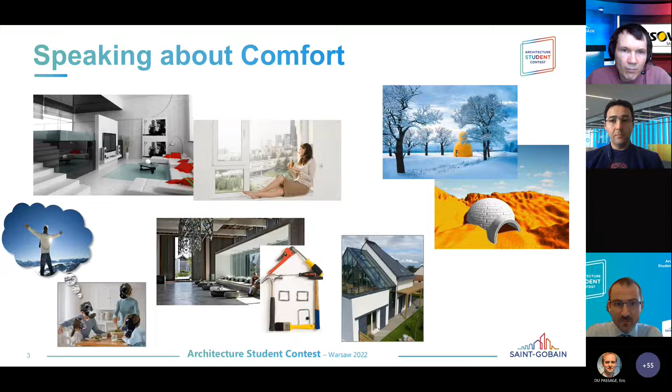Now, everybody is speaking about comfort, but the question would be, why do we speak so much about comfort? Well, feeling good is not just desirable. It's needed because it also has an impact on the way that the human body is working. There are so many medical and other research studies showing that if you feel good, if you have access to a certain level of comfort, then you can think faster.

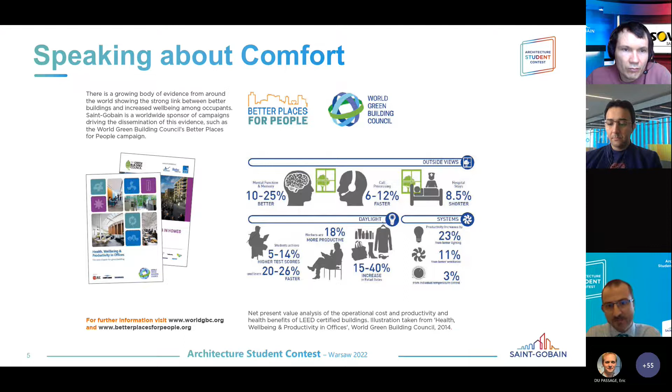Then there are plenty of examples. I will show you some others linked with higher scores in tests and so on, with productivity and so on. So it's not just that we desire this, but it's also needed. It's a question of how the human body is designed to work, if you wish.

Now, within the scope of the competition and within the scope of what we call comfort dimension in Saint-Gobain, we focused on 4 dimensions. One is linked with the feeling, it's the thermal comfort. The second one is linked with visual, with seeing, and it's linked with visual comfort. And then the last 2, one is the acoustic comfort, and the other one is linked with the indoor air quality, or if you wish, we can call it indoor air comfort.

These are the main 4 dimensions that we look at, and about these 4 we will try to give you some ideas, some hints, some direction, which in the end would serve you in the way that you think about this project. The final touch is yours. The project would represent the way that you interpret this, the way your mind was thinking about these dimensions and about comfort in general, for the well-being of the people that will live in the dormitories that you will design, or the people that will come in this renovated building that you will design as well.

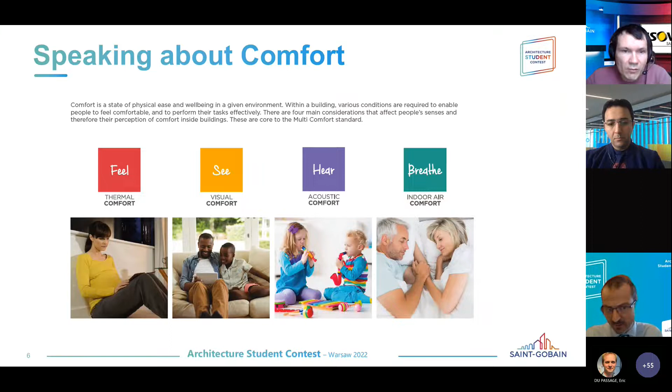Now, thermal comfort. Thermal comfort most of the time, or at least in our part, and when I mean our part, it's continental Europe, is most of the time linked with cold. You have minus 10, minus 15, minus 20, even more in some cases. Then you need to ensure that the temperature inside the house, your building, your office, whatever, is comfortable. But it can be also the opposite. It can be the comfort during the summer.

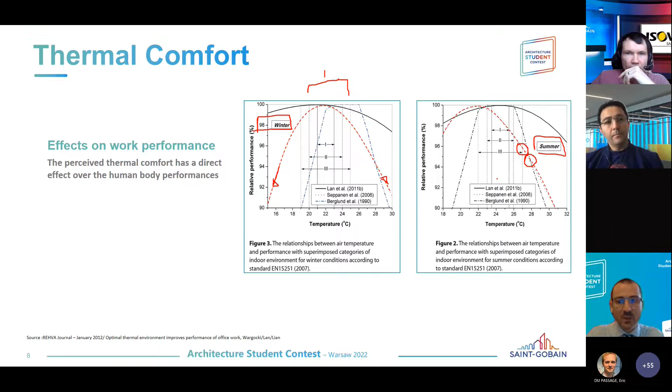In the summer, if you are at 27 degrees, maybe 28 degrees in a building where the ventilation is not designed well, you will have this decrease in the performance of the body, because the perceived thermal comfort has a direct effect on how the human body works. So it's not only that we desire this, it's also needed in order to work and perform with good quality.

Okay, what does thermal comfort mean? It has to do with the air temperature. It has to do as well with the surface temperature. You can heat a room, but if the windows are really poor and you put your shoulders close to them, you will have this chilling effect, and it will not be comfortable. It has to do with humidity and so on. To summarize, the idea is that you keep the temperature within the good region, using as little energy as possible.

Then it's good to have surfaces that are really pleasant when you touch them, and to avoid draughts even at floor level. There are many solutions you can choose from, starting with glazing, continuing with insulation, with plaster and plasterboards, with membranes to improve the airtightness and manage the moisture, and so on.

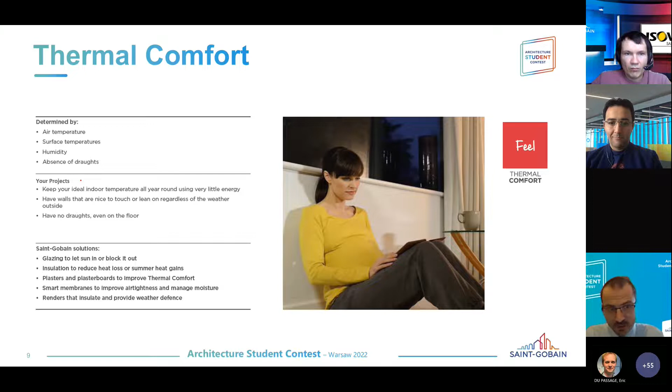Now, a few words about visual comfort. The eyes will perceive it, and when you design, you tend to think with your eyes, because this is the first impact that you will have. You will see the space, you will see the building, you will perceive the light, the colors.

There is so much evidence about visual comfort and its connection to light, and how important light is for human beings. I remember this very old Chinese saying, stating that in the house where the sun does not go through the window, the doctor will enter through the door.

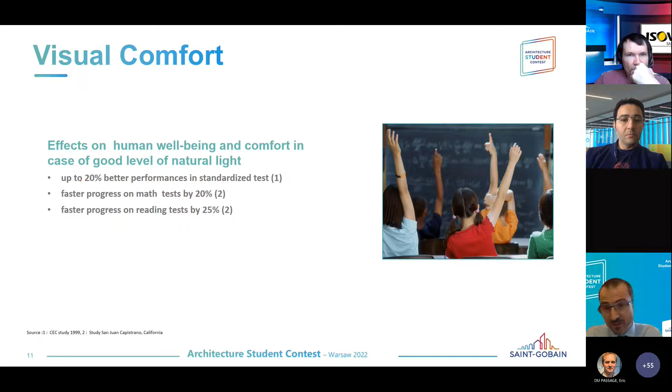You can link this with evidence showing that if you give good access to light in schools, the possibility of children to learn will increase, and the body will function better. As a result they will have better performance, faster progress on all kinds of tests like math or reading, and so on. This is just a few examples of the evidence.

Speaking about visual comfort, you can also think about the view outside. It's quite important to allow the workers, the people who inhabit the space, to have a view outside. The quality of the light, the luminosity, the absence of glare, and in general strive for having as much natural light as possible, without glare. Try to have rich colors, and try to bring the outdoors inside, in a manner of speaking. Here again, you can find many solutions within Saint-Gobain's portfolio, starting from transparent products to translucent ones, and opaque interior products.

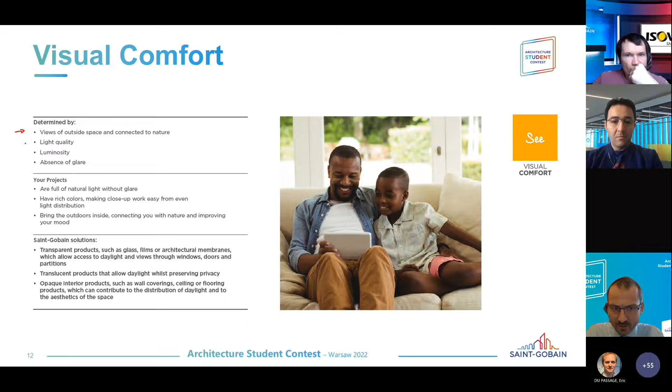Another important dimension would be acoustic comfort. We speak many times about how it's important to have quiet, and maybe it's also important to show a little bit why.

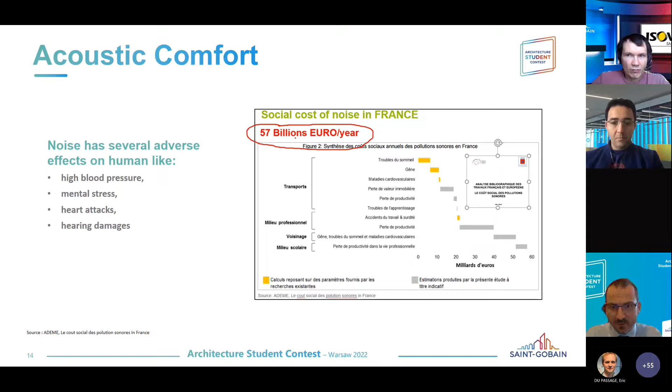Here you can see a report from France, ADEME, which has monetized the social cost of noise in France. I believe this was done around 2017-2018, and at that time the estimated social cost of noise was around 57 billion euros a year. This is basically the cost of noise in France, and you will find similar figures everywhere in Europe.

This is linked with the fact that noise has several adverse effects on the human body, starting with high blood pressure, mental stress, and ending up with heart attacks, hearing damage, and so on. We'll speak a little further about this in the acoustic presentation.

You need to take care about noise from outdoors, or noise from neighbors. You need to take care of noise which is propagated through the building structure. If you live in a multifamily building, and the building is poorly insulated, you will definitely know if somebody is doing some kind of impact action on the higher floor, like preparing some kind of schnitzel or whatever. You will feel it on the lower floors as well.

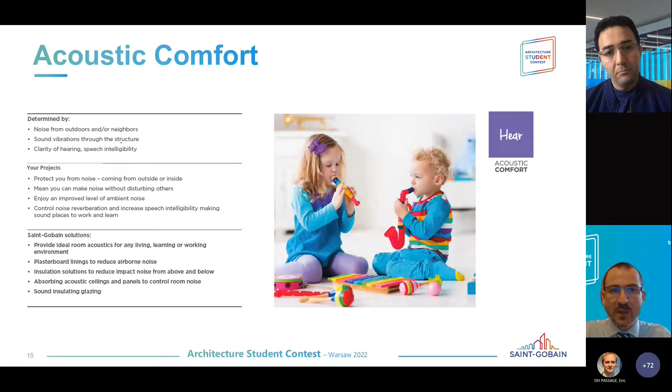Last but not least, and this is also very important, there's the clarity of hearing, the speech intelligibility, to be able to listen to what the teacher is teaching. Again, many Saint-Gobain solutions here can provide you with acoustics - solutions from plasterboard, insulation, acoustic ceilings, and so on. All of this is linked with acoustic comfort.

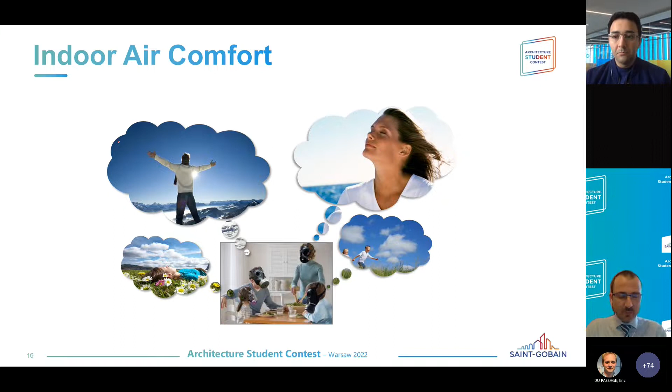From actions linked with basic strategy, basic activities, or initiative, you will find that the human body is unable to react in the right way. We'll speak a little further about this also in the indoor air quality training.

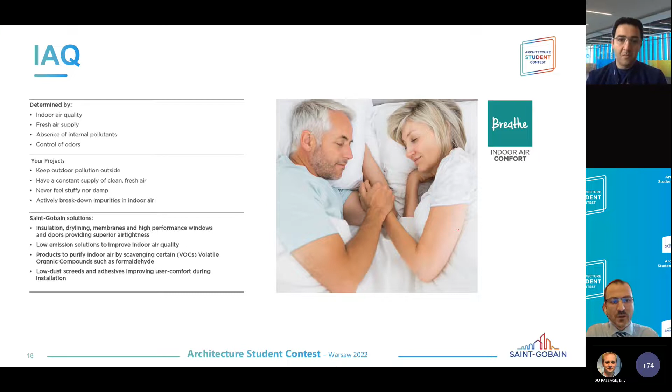So, indoor air quality, fresh air, and plenty of solutions that you can choose from Saint-Gobain.

Now, to sum them up, with some other examples - if we speak about thermal comfort, you can see here that there is a reduction of performance by up to 6% in case of overheating.

Just imagine yourself designing an office, and not thinking very clearly and very sharp about overheating, so you have very high temperatures. The percentage of lowering the performance of the workers, if you translate it into money, it's impressive. Here you can see the increase of productivity, and productivity can mean everything from being able to screw faster, to work something manually, up to the learning curve. It goes up almost by 20%.

And then you have, if you speak about poor indoor air quality, a decrease of 10% in performance. Or, if you wish, here it's about offices - about 65% of the people working in an office will be distracted by too much noise.

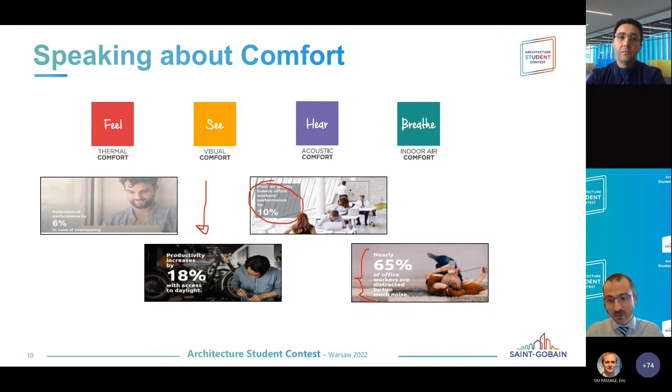Also, something which deserves a few moments - just to introduce it briefly, and we will discuss it a little further - these four dimensions are interconnected. When you choose to work on one, you need to take care of what happens with the others, because the connection between them is very strong.

Just think about the fact that I work on thermal comfort, I design a house, I think about a construction whose aim is to have thermal comfort, and I make it very, very tight, just to avoid any losses of energy. If I make it very, very tight, then all the air gains I was having through the cracks and the unintentional gaps of the building are no longer there. And suddenly I am stuck in a house which is very well designed thermally, but extremely poor in terms of indoor air quality.

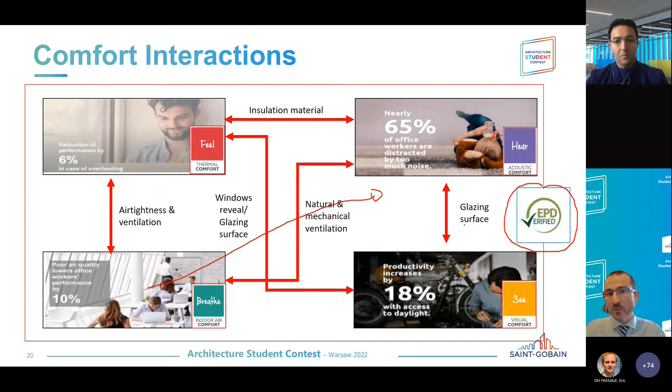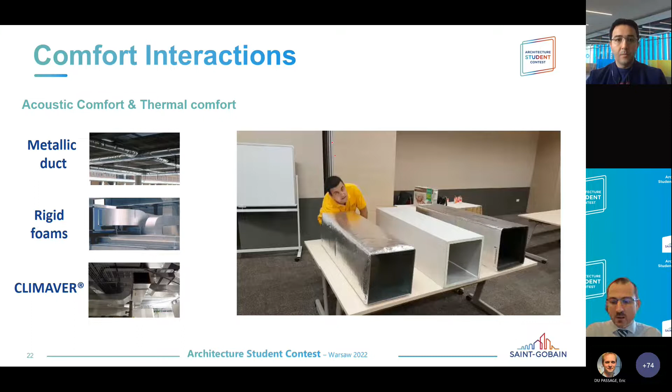And here are some examples about acoustic comfort and thermal comfort. I will come to this in the next discussion, as well as for indoor air quality and comfort.

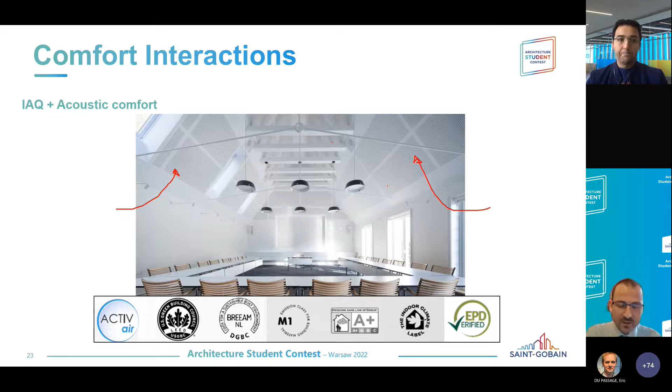So it's always a question of looking, broadening your view, and trying to think from different perspectives. When you choose a product, you ensure that it supports finally the sustainable approach, thinking about different comfort dimensions. That's why I put them together.

We have these four sensorial comforts: the feel, the seeing, the hearing, and the breathe. But you also need to think in terms of energy and carbon, material and resources, and last but not least, health and safety, because they are basically two faces of the same coin.

On one hand, you think about comfort. On the other hand, you need to think about sustainability. We need to design for using as little energy as possible and emitting as little carbon as possible. You cannot have one without the other—they do not work, and human beings will strive to get the one that's missing.

That would be the introduction part.

Okay, any questions so far? First of all, did you hear me up to now? Because I was kind of in a cave, you know. Yes, it was okay, totally clear. Okay, any questions? I'm popping up for questions, striving to get some from the students to see if it's all clear. Then we need to sit one more hour and discuss it. No questions? No? It's a sort of a further illustration, if you possibly can give me.

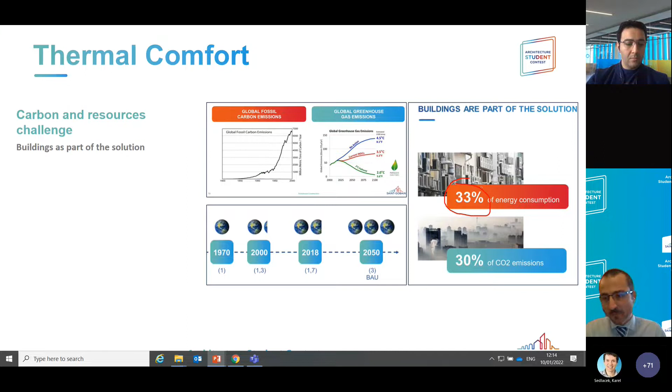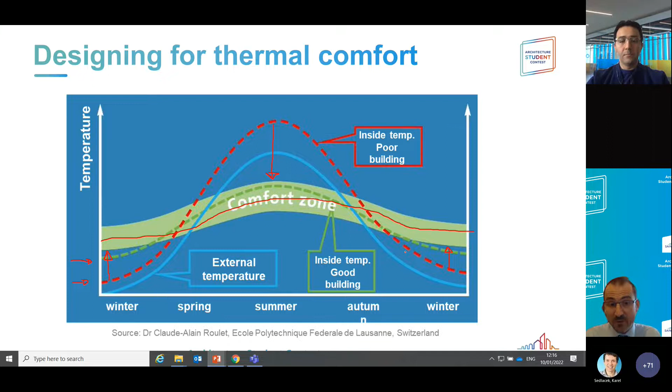Now, there is a very nice movie that I would like to share with you. Just allow me one second.

Okay, I have it here. Hopefully, and please let me know if you can hear as well the sound. You can hear the sound? No, we can't. Oh. No. Moment, I guess. You have to reshare your screen. Yeah, no worries, no worries, I will do that in a second. So let me see, maybe now.

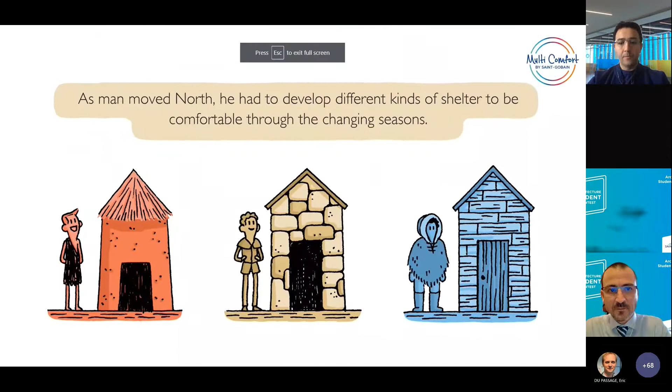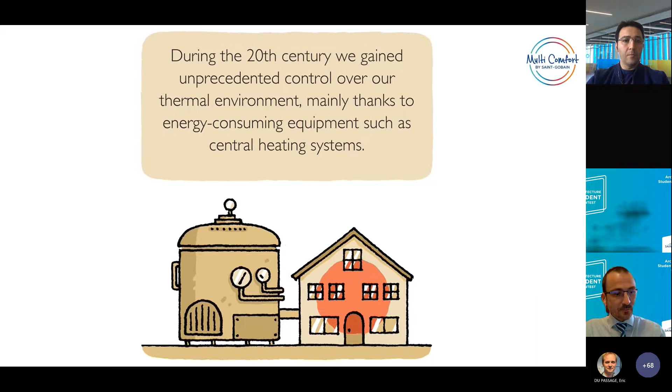Early settlement began in mild climates. As man moved north, he developed different kinds of shelter to be comfortable through the changing seasons. The building envelope, which acts as a filter between the inside and the outside, gradually became more sophisticated. During the 20th century, we gained unprecedented control over our thermal environment, mainly thanks to energy-consuming equipment such as central heating systems. As we advance into the 21st century, world population, the percentage of urbanized areas, and expectations of comfort and well-being continue to grow.

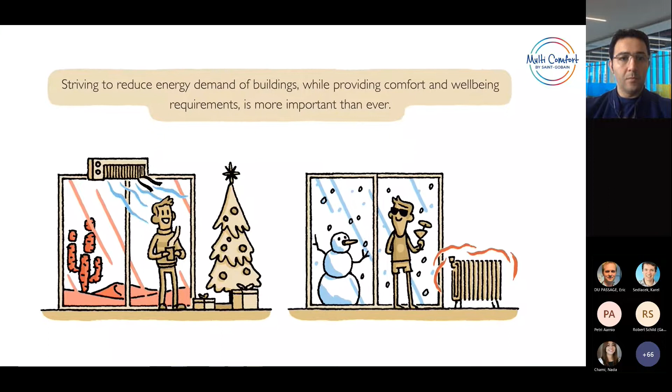Striving to reduce energy demand of buildings while providing comfort and well-being requirements is more important than ever. Designing efficient building envelopes is one of the first steps to consider.

Today, we spend more and more time indoors, where we expect a level of thermal comfort that ensures comfort and well-being, but can be provided efficiently.

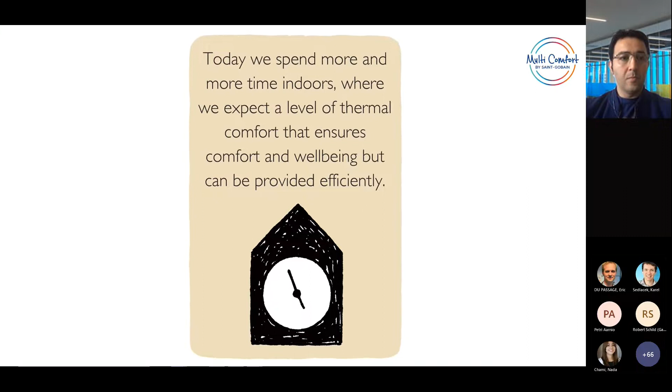While extremes in temperature can be fatal, even gentle fluctuations can cause us increased pleasure or discomfort. Concentration, manual dexterity, and instances of accidents can be influenced by both high and low temperatures.

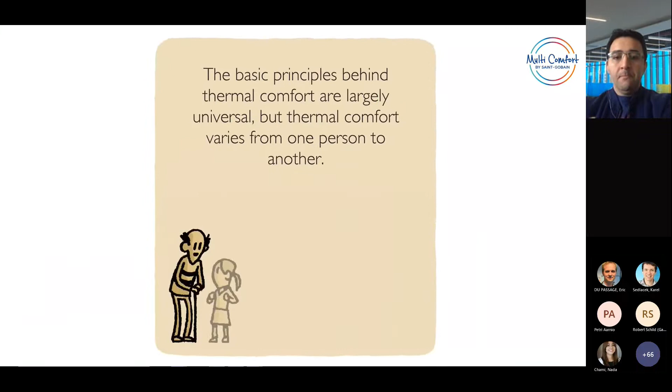The basic principles behind thermal comfort are largely universal, but thermal comfort varies from one person to another. The physiological aspect of thermal comfort.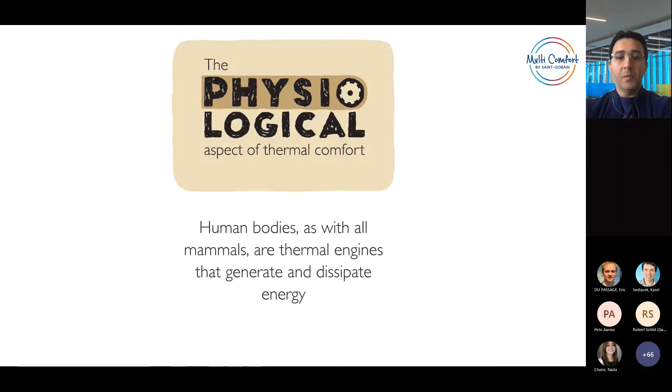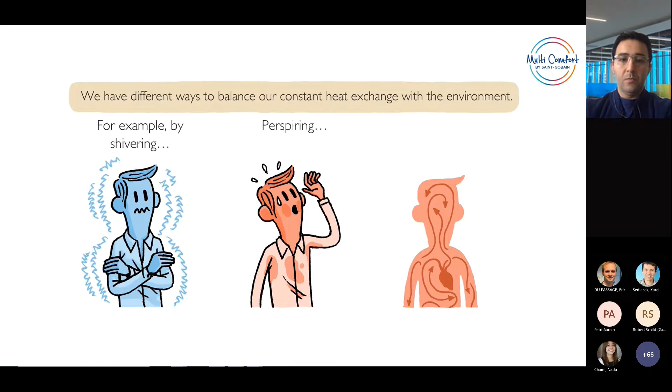Human bodies, as with all mammals, are thermal engines that generate and dissipate energy. We have different ways to balance our constant heat exchange with the environment, for example, by shivering, perspiring, or modifying our blood flow to regulate heat distribution.

The objective of our metabolism is to regulate our body temperature with minimal effort, if possible. So we need to be able to control the physical environment surrounding us. The physical aspect of thermal comfort.

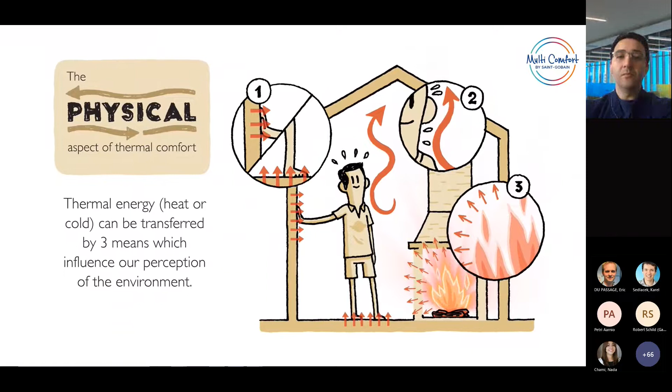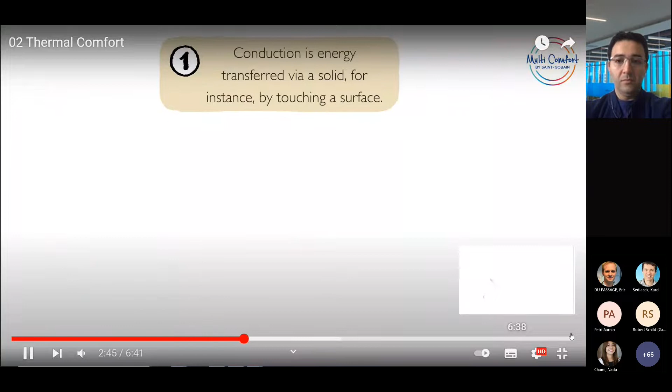Thermal energy, heat or cold, can be transferred by three means which influence our perception of the environment. One, conduction is energy transferred via a solid, for instance by touching a surface. Two, convection is energy transferred from a solid to an adjacent gas or liquid. Three, radiation is energy emitted from a surface.

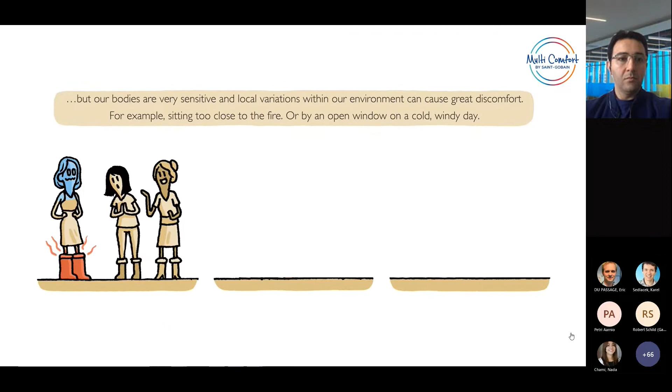An overall balanced thermal environment is key to feeling comfortable. But our bodies are very sensitive, and local variations within our environment can cause great discomfort, for example, sitting too close to the fire, or by an open window on a cold, windy day.

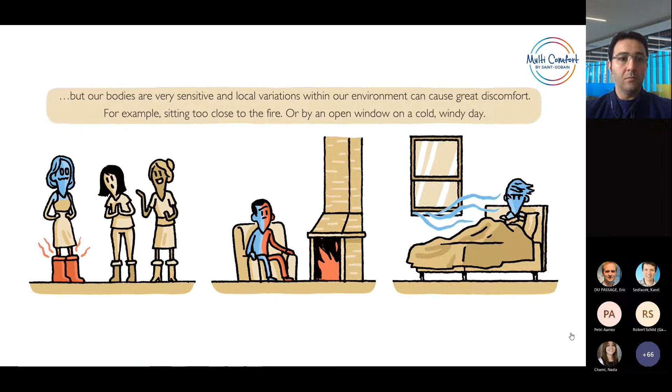The socio-psychological aspect of thermal comfort. Many other factors influence our perception of our thermal environment: our current emotional state, mood, or how tired we feel.

Our thermal programming and social background, as well as other environmental factors such as noise or glare, which can make us agitated and feel hot.

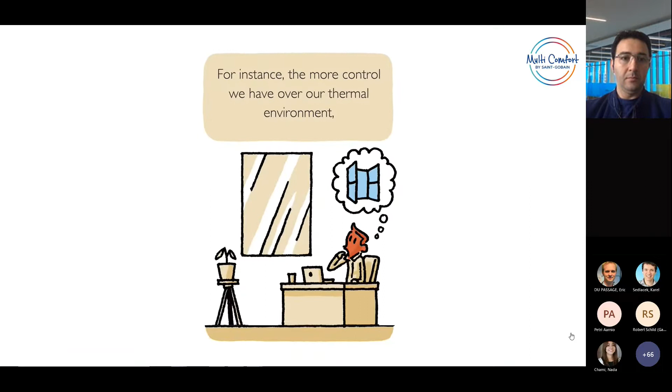Our perception of heat also depends on varying tolerance levels. For instance, the more control we have over our thermal environment, the better we feel and the more productive we are, whether or not we choose to use this control.

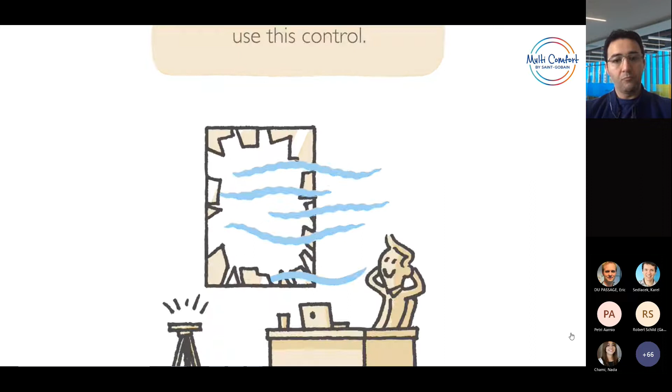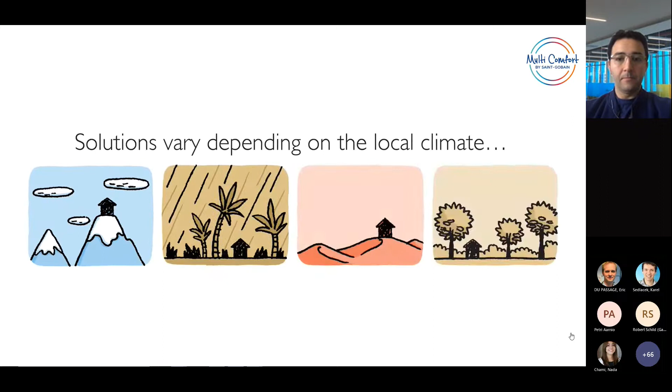Designing for thermal comfort. There is no one-size-fits-all recipe for thermal comfort. Solutions vary depending on the local climate, as well as the type of activity performed by the building users.

The building envelope acts as a filter between the exterior and interior climates. Designing it efficiently implies the consideration of five main factors.

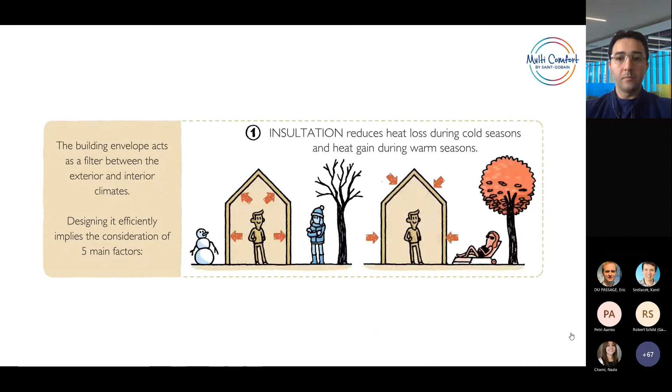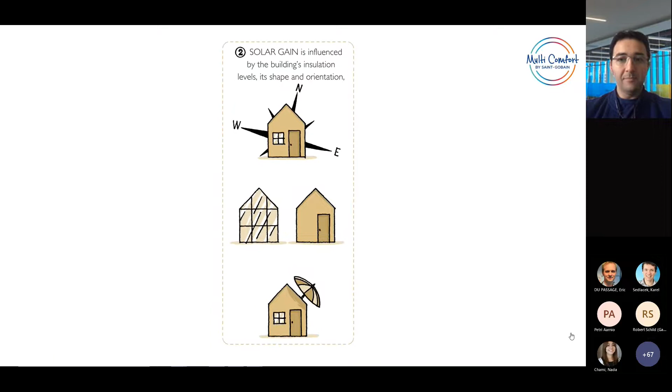One, insulation reduces heat loss during cold seasons and heat gain during warm seasons. Two, solar gain is influenced by the building's insulation levels, its shape and orientation, the window to opaque wall surface ratio, the type of glazing, shade or shading devices.

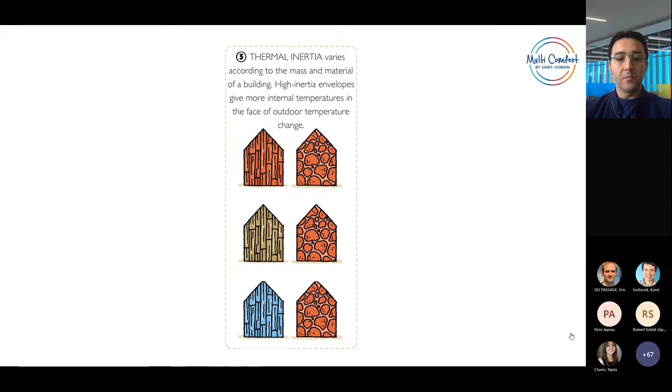Three, thermal inertia varies according to the mass and material of a building. High inertia envelopes give more stable internal temperatures in the face of outdoor temperature change.

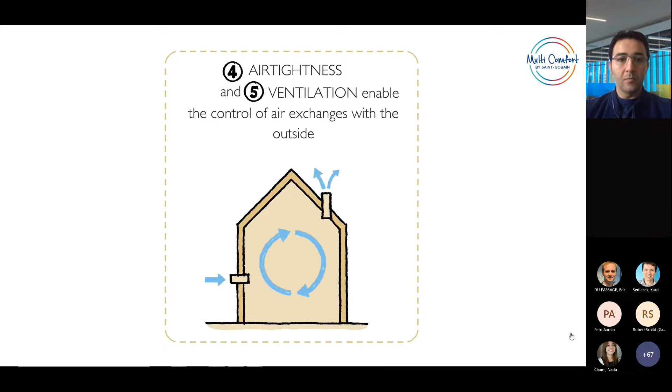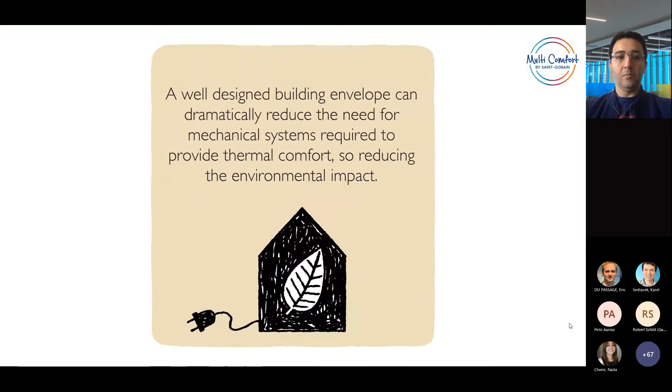Four, air tightness and ventilation enable the control of air exchanges with the outside. A well-designed building envelope can dramatically reduce the need for mechanical systems required to provide thermal comfort, reducing the environmental impact.

The future. Although our basic thermal comfort requirements are likely to remain the same in the future, our outdoor environment is likely to change further. Climate change will play an increasingly important role in the design of the built environment.

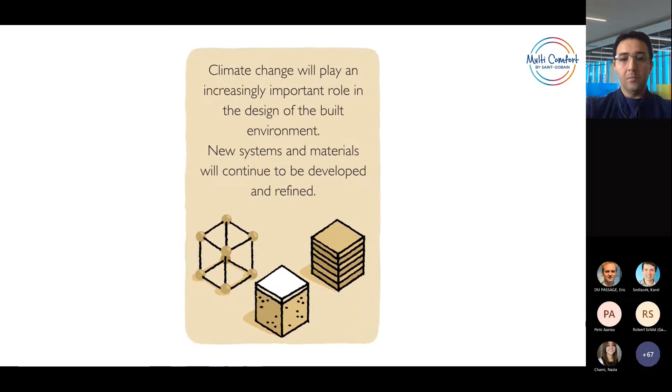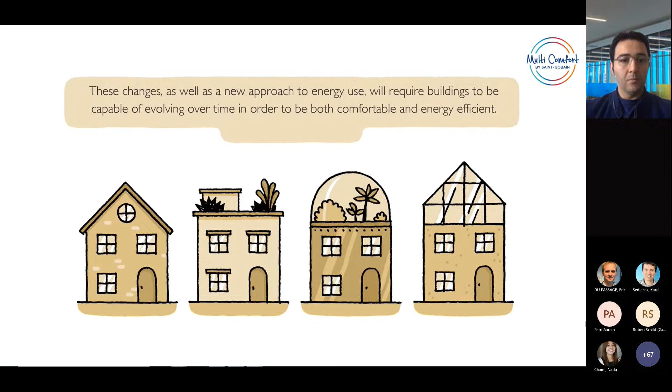New systems and materials will continue to be developed and refined. These changes, as well as a new approach to energy use, will require buildings to be capable of evolving over time in order to be both comfortable and energy efficient.

A key factor in this evolution will be to ask ourselves what levels of thermal comfort will be considered acceptable. Should we just put on a jacket rather than turn up the heat?

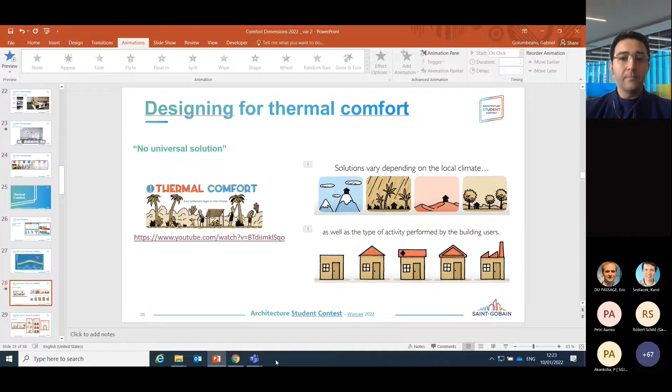Yeah. That's an open question as well. What will be the level of thermal comfort in the future? How will humans react to this in the future? Because this is also a question open for the interpretation of the participants, because you can think this from both perspectives. You can think, okay, I'm designing, looking at this, I did the maximum which I could do, but it's also something that the humans need to take into account, human beings as such, need to take into account themselves. Now, we were seeing here some of the main criteria.

You can see still the presentation, yes?

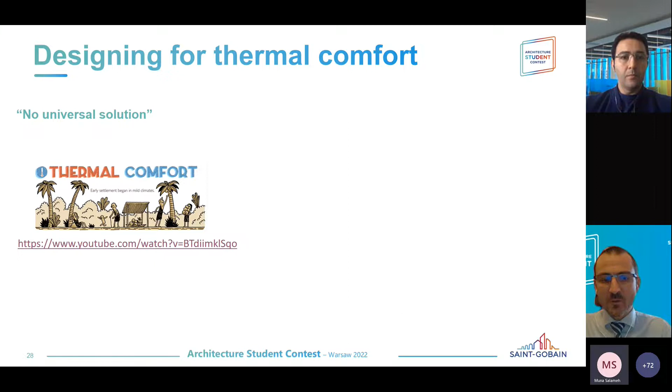Yes. Good. So, when it comes to the variation depending on the local climate, we know for sure that we are in a European moderate, cold moderate climate. We know also the activity that will be performed there. So we remain with some ideas that we can discuss.

First of all, we are looking at the envelope. So we need to treat the envelope in order to ensure that during the winter I have pleasant temperature inside, that it doesn't get too cold, and also during the summer I ensure that I don't have too much heat. Then once I have worked on this, I can think about the second step, which is the solar gains. Linked with this, it's the way that I'm going to organize my building, the way that I'm going to design it towards the cardinal points, then the type of the glazings and how much I will make the glazings.

And then we can look as well at the thermal inertia, and we can look as well at the air tightness and ventilation. And this part with the air tightness and ventilation, in my opinion, it's linked also with indoor air quality, and I will discuss a little bit about it within the second session of indoor air quality.

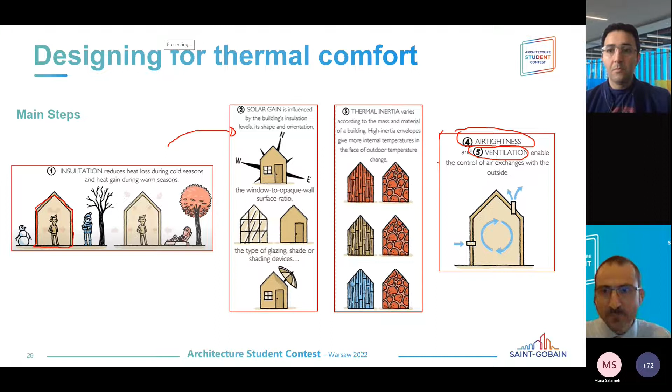Now, coming back to what we were discussing, we know that a well-designed building envelope can dramatically reduce the need for mechanical systems. That's also our aim, to ensure that by the envelope itself, because this is the first step, I decrease as much as possible the need for mechanical systems, independently of what the mechanical system is. Can be the central heating system. I design it in such a way that I need only small amounts of energy to keep it cooler in the summer or pleasant in the winter.

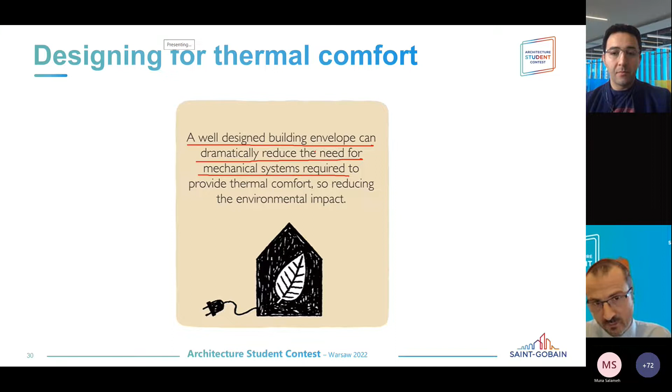Now, if I speak about this and the usage of energy, this is a study which was done some years ago. They were asking people if they have an idea how much of the energy that they spend is used on different things. And you can see here on the right side the consumer's opinion. So the perception was that we use a lot of energy on the electrical appliances, of course a lot of energy on heating, but also a lot of energy on hot water.

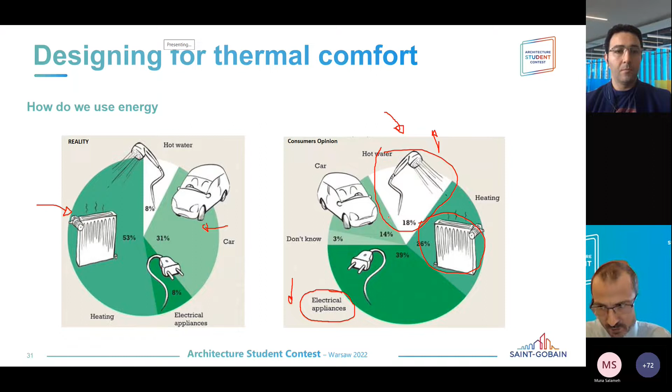And if I'm looking at the European moderate climate, roughly around 75% of the energy is used for heating and cooling. If I go more towards north, it will be heating, almost no cooling. If I go to Spain, to South Europe, then I will have a little bit of heating, but I will have a lot of cooling as well.

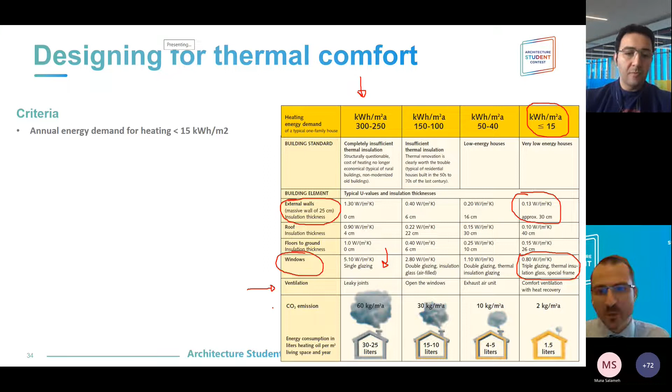But then if I fully insulate the house, and I do all the things that I can do to keep the energy inside, maybe I find a smarter way to ventilate than to open the windows, because it's pretty much like I would have a very good fridge, but then I keep it open. It's pretty much the same principle, if we wish.

And then the more tight the building is, the more I need to bring this air to be able to breathe. And if I'm depending on some kind of a system to bring the air, maybe I can make a transfer of energy from the air that I have to take outside to the air that I have to bring inside. And this way, I have some kind of ventilation with heat recovery.

And here you can also see the effect in terms of CO2. From 60 or maybe 30, depending on when the building was designed, I would go to about 2 kilos per square meter in a year. That's just to give you a rough feeling of where this criteria positions you in terms of building.

And this is generally the criteria that is going out in Europe, because almost everywhere in Europe you have this nearly zero energy building legislation, which lowers very much the consumption that you need for heating and cooling the building and for all the others. And on top of it, it brings active measures of generating green energy.

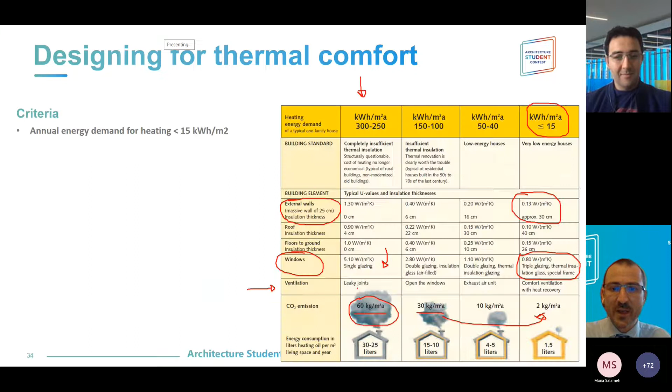Okay, and this is also what I was mentioning. If I try to put active measures on buildings like this, well, I don't have the right word, but it is not effective. I'm consuming so much that I would need to produce a huge amount of energy, and I'll still need to invest a lot to do it.

The right way, the smart way to do it is first to decrease as much as possible the energy need through the envelope. And then whatever needs remain, and these needs are linked with comfort, I can either support them to a net zero energy level, which means that my building will be a zero energy building. I will not consume energy. I will not generate either, but I can very easily go one step further and make my building a generator of energy by using photovoltaics, if you wish.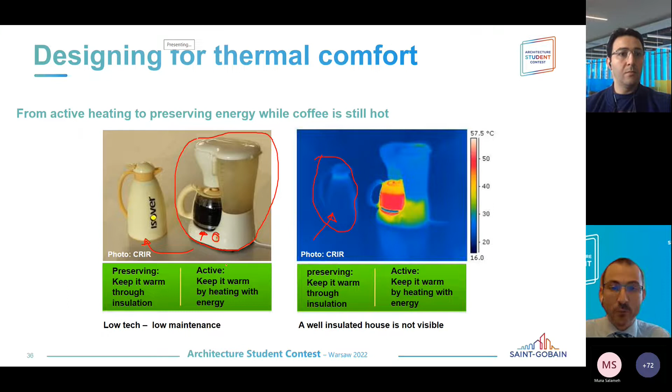This one shows nothing. And this is the kind of image that you should strive for in your buildings. If I transfer this image to a building, this is how it could, or how it should look. Yeah, this is a very poorly insulated building. You can see it bleeds energy, it bleeds heat all over. More at the structural things, which are here, here above the windows and everything else, here at the last floor. And here,

it's more or less the same image of the same building after retrofitting. And you can see here in terms of the wall that the losses have been very much decreased. Here there are some open windows, tilted. Here you can see as well that there is some kind of ventilation which was put in, and of course here is the open door. So we can say that the entrance door is not necessarily the most performant.

But this is what you should strive for. This is the image that you should think about, and this is very simple to look at. This is an energy audit which is done. Just take an infrared picture of the building, and you can instantly feel whether this building has been well designed, or contrary, has not been very well designed.

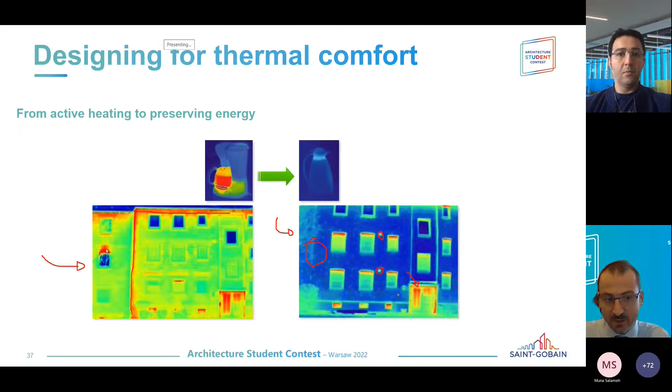Now, if we speak about how you get from active heating to preserving energy, well, we need to look a little bit at how we lose the energy, or through which elements we lose the energy. So if I'm looking at a house which looks slightly like this, then I'll have about 25% through the walls. I will have about 30% through the roof. Something will go through the basement. I'll have the windows, of course. I will have some air leakages, and last but not least, I'll have some thermal bridges which are influencing my losses. And if I put this together, because I lose something, then I need to ensure that this energy which is needed, I put it somehow back.

And if I'm having on this side the losses, then on the other side here, and I'll just scroll in, I have the gains. And what kind of gains do I have in a building? Well, first of all, I can play with the sun. I can always get a lot of energy from the sun. It's just a question of using it correctly. Then I also have some internal gains. I gain heat from the people who are working, because basically each person is somehow like a small radiator. I can get energy from the computer. I can get energy from all kinds of devices that I have inside.

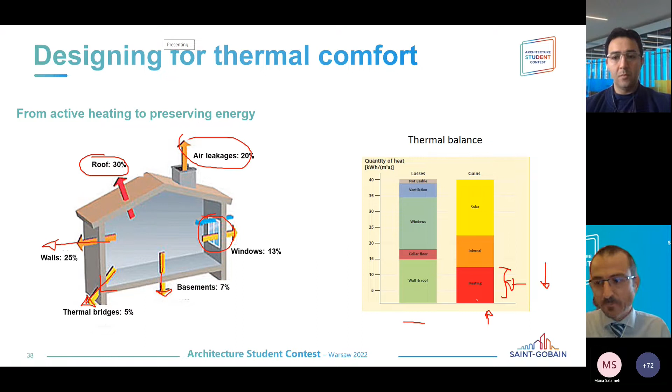Now, this is from a training many years ago, and you can see here the standard approach which we have, pretty low performance in terms of insulation and in terms of windows. And then what we used to do is get the engineer putting here a radiator to compensate for the cold air, and to have this comfortable feeling. Today you always have the possibility of insulating the building very well. Not only insulated, but I'm ensuring that I have very good windows. So this way the temperature on the surface of the windows is no more, I don't know, 9-10 degrees. It's more towards 17.

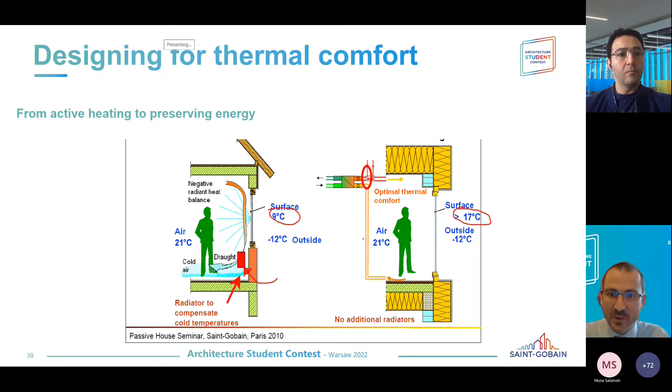So then I don't have this feeling of discomfort. And then last but not least, if I'm very well balanced, I can even think in some cases to support it by heating through air, or if not, I can use some conventional systems like heating through the floor or through the ceiling, but still the energy that I need for heating is decreased by a factor of 9.

Now, I was mentioning that you have some specifications in the task. You can see it here. You have a U value for the roof, so it's just a question of getting a roof detail which will respect this value. Then you have a U value for the external wall as well. You also have the U value for floors on the ground, so the floor on the ground for the building. And last but not least, you have some U value for the windows.

They are generic, they are given as direction. It's good to think about them and to do some kind of exercise. You can always contact your Saint-Gobain leaders or contest coordinators to support you with construction details from each country, or with general details on this. But it's good also to do the exercise yourself.

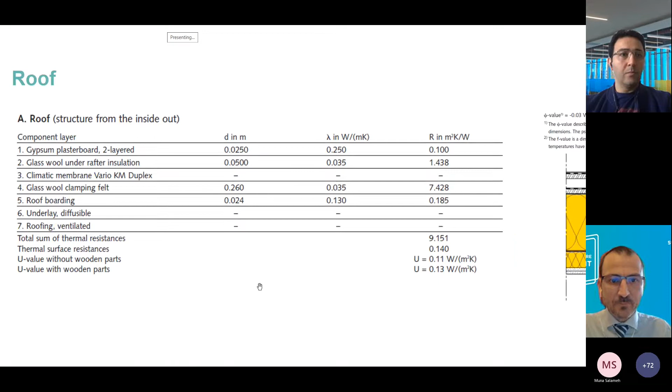You can see here one detail of a roof. If I look at it, I will just scroll down. Now my detail looks a little bit like this. I have a layer of 2 plasterboards.

It's okay? Can you hear me? Can you hear me? Yes, we can hear you, but someone is disturbing.

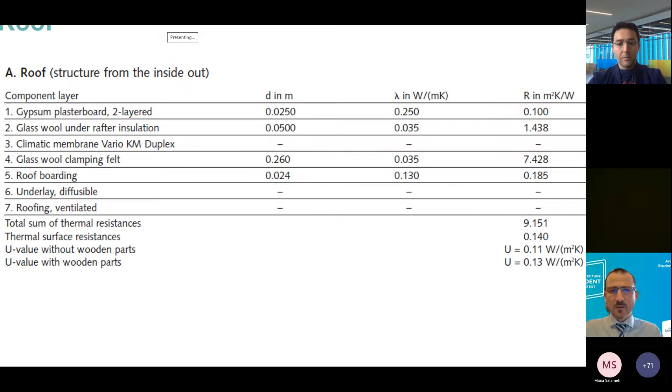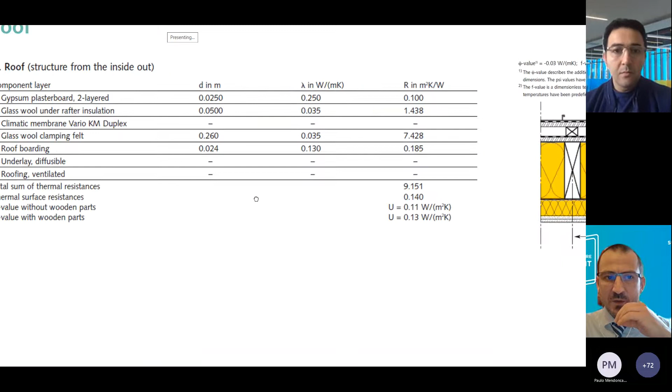So I was saying that you can have plasterboards, then you have some insulation between and below the rafters. Then you have an air tightness layer, and this is important, and we'll speak about it. And then you have the structure of the roof.

As a general level, you can see here that this part is 5 centimeters, and the insulation between the rafter is about 26 centimeters. So if I sum this up, it's about 31 centimeters of insulation. And then also here you have an air tightness layer, which is going all around the house.

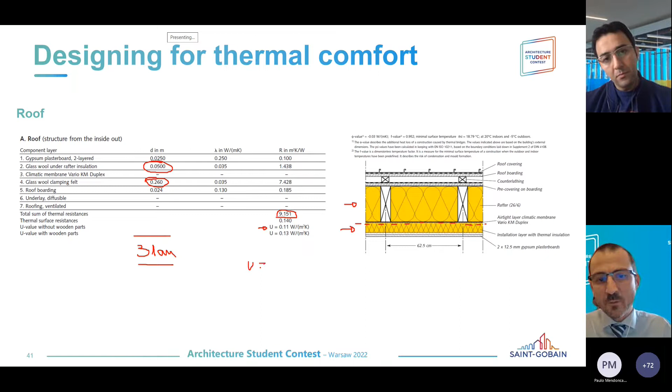Together with other parts, this ensures that your building is tight. You can calculate this as a thermal resistance, but you can also calculate it as a U value, a transmittance, and then it's the opposite: U equals 1 by R, the very straightforward equation. But this is just to give you an idea. You can always find on the website of Saint-Gobain, and plenty of other tools, that allow you to calculate the U value or the R value of construction, and plenty of details with these values as well. This is just to give you an idea of what level we're speaking about.

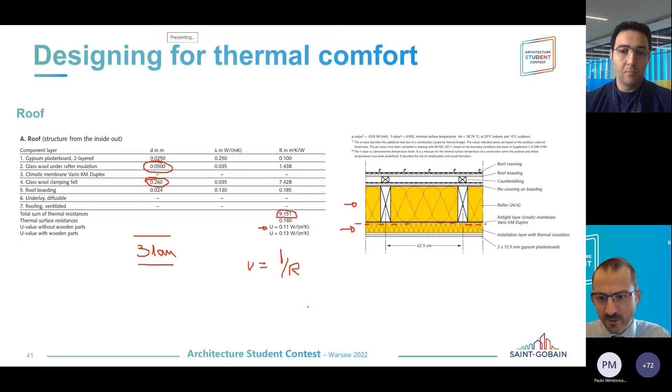Now, if we spoke briefly, just to give you some ideas about the roof and the wall, you will find plenty of insulation information on the Saint-Gobain local websites, and if you have any questions, please address your coordinators, your country contest coordinators.

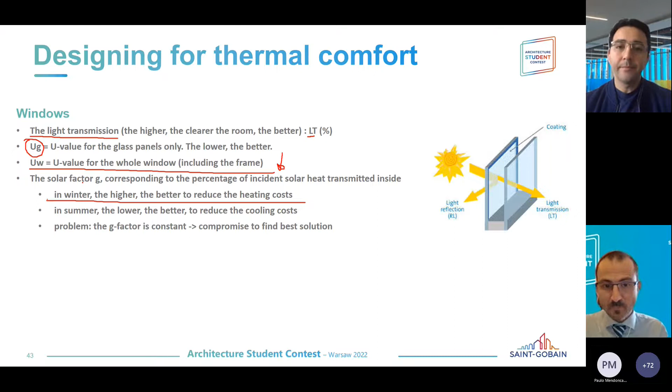If you look at the different types of windows, speaking generally about single glazing, double glazing, and triple glazing, you can see that the more sheets of glass you have, the light transmission decreases, but if I am over 70%, then it's okay, and if I am over 75, then it's even better.

The UG, how well this glazing of the window insulates, decreases from 5 to 0.6 or 0.7, so you have a decrease of almost 10 times.

Then you have here some standard G factor, solar factor, which is close to 1 in case of single glazing, and on average it's about 0.5 to 0.62 for triple glazing. However, here you can have solutions from, I don't know, 0.3 up to, I believe, 0.7. So you have a much wider interval of choosing.

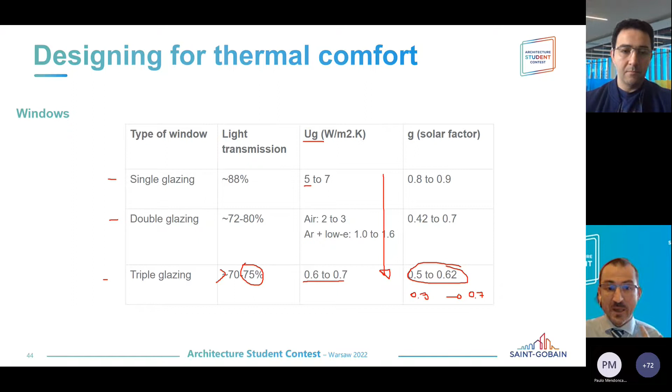Now, the way that you choose, it's up to you to decide and to think about it. You can play with the sun to reach a high energy performance in building. If I need to put windows on the north side, then in terms of energy balance, it doesn't help me a lot. But it can be that I need them just to provide light.

So whenever I need this, from thermal perspective it's good to have a low U value, and if possible not that huge amount of windows or glazing towards north. But I'm speaking here only from thermal perspective.

If because of the site, or other constraints, I need light, I need to place my working spaces towards north because there is the view, then I do so because I need to think also about the visual comfort. And then I know from thermal comfort that I need a very low U value, and I dimension my windows taking into account my light criteria.

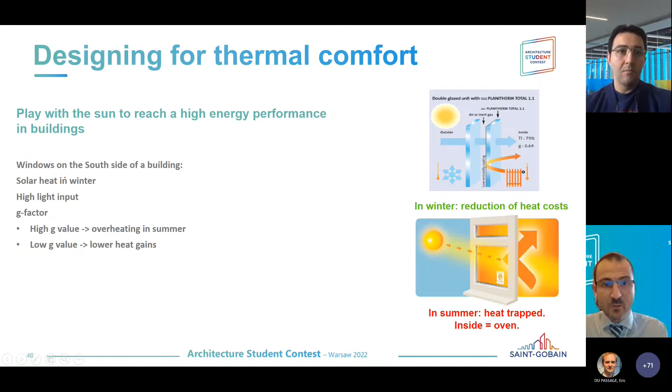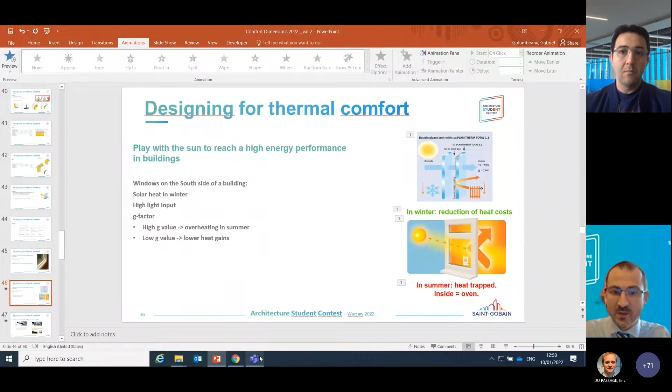I will stop this one here just to get a chance to go to the questions, and we'll continue this in the second part. You were mentioning, Eric, that there are some questions. Let me double check myself as well. I'm not seeing them, but maybe okay, so well, I think there are several.

Fatima asks: in the room a natural daylight autonomy of 60% should be achieved. How can we analyze this sentence, and what exactly does 60% autonomy mean? Well, we will speak about this, or you will speak about this tomorrow in the visual comfort training. There are several ways in which you can evaluate it, and several tools that calculate this daylight autonomy.

In principle, the daylight autonomy tells you that during the time period you define - let's assume this 60% applies to a school, meaning during the learning program, which can be from 8 o'clock in the morning to 5 o'clock in the afternoon - in 60% of the time of the year, you have on average 300 lux of natural light inside your room. This is the minimum.